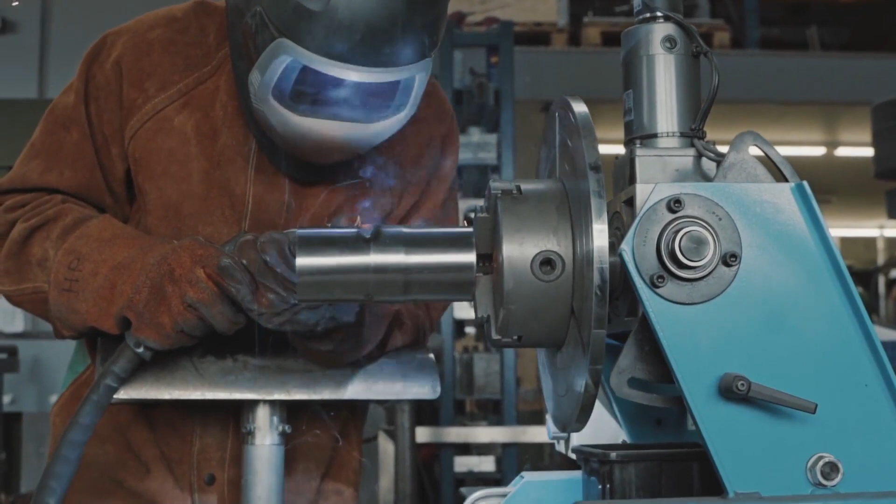Welding is a process of joining metals or non-metals. They can be similar or dissimilar, with or without application of heat, pressure or filler material. In more general terms, welding is a fabrication process whereby two or more parts are fused together by means of heat, pressure or both, forming a joint as the part cools.

Welding is usually used on metals and thermoplastics, but it can also be used on wood.

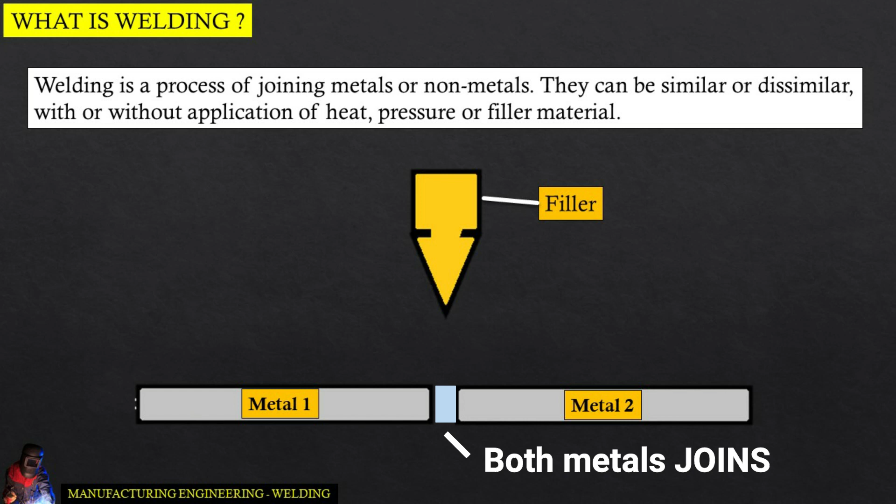The advantages of welding are: they generate strong joints. Welding process saves material, reinvestment cost is also low, and leak proofing can be done.

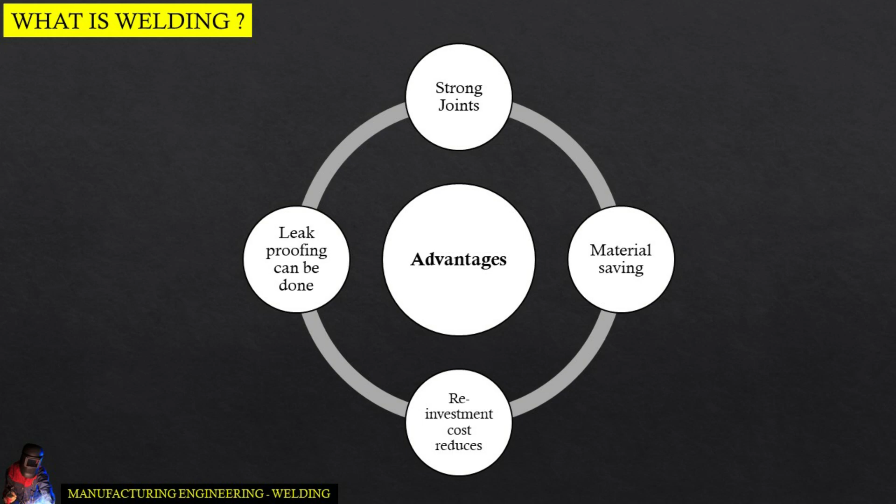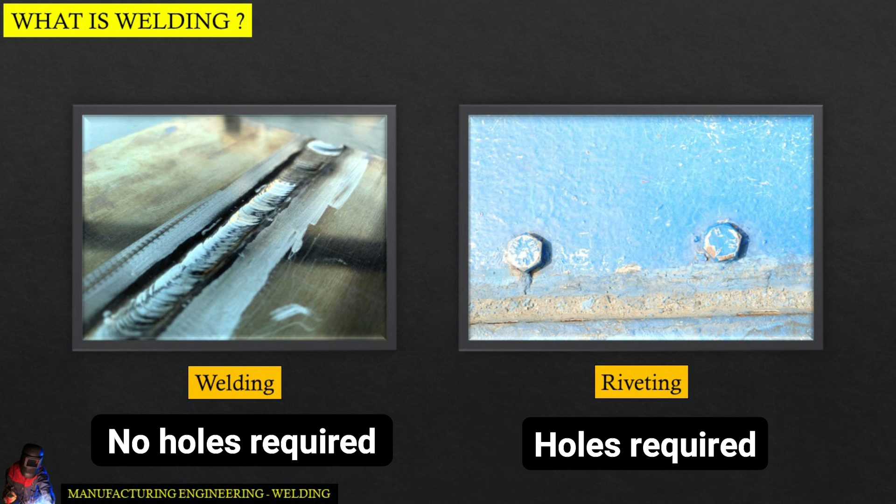Now let's differentiate between welding and riveting. In case of welding, no hole is required to drill on the parent component in order to join them, whereas in riveting, there is a need of through holes in specific locations on the parent component for the passage of rivets.

Strength of welded joints are quite high, often more than the strength of the base plates itself. However, strength of riveted joint is comparatively low.

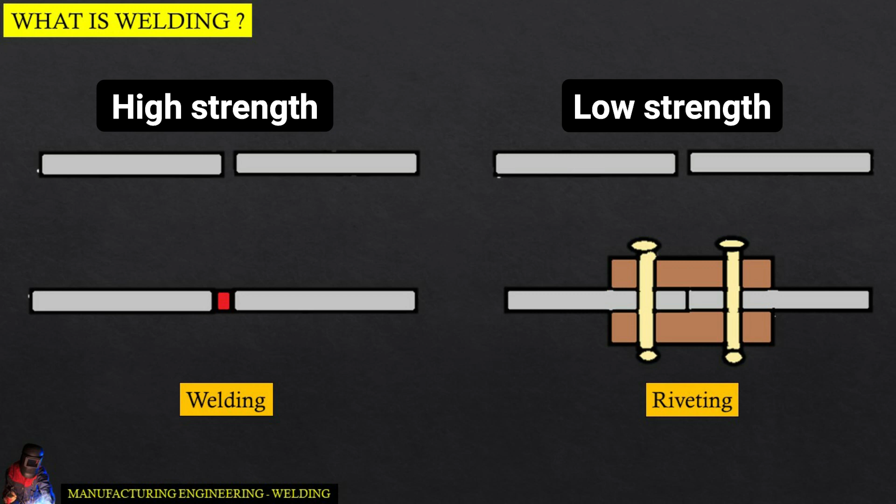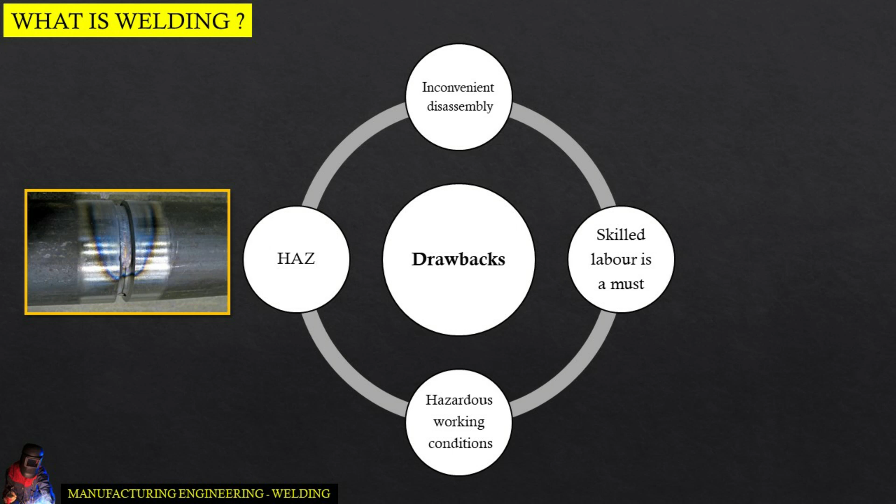There are certain drawbacks to welding as well. First being inconvenient disassembly. Second, you must have a skilled labor in order to carry on the welding process. Thirdly, the working condition is very hazardous. And fourthly, HAZ, or the heat affected zone.

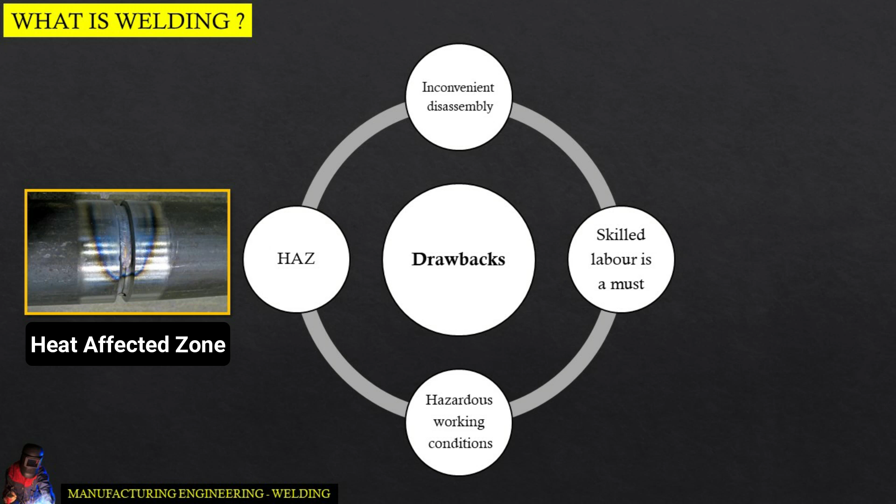In welding, the heat affected zone is the area of base material, either a metal or a thermoplastic, which is not melted but has had its microstructure and properties altered by welding or heat intensive cutting operations. The heat affected zone, or HAZ, refers to a non-melted area of metal that has experienced changes in its material properties as a result of exposure to high temperatures.

The alterations in material properties are usually a result of welding or high heat cutting procedures. The HAZ is identified as the area between the weld or cut and the base metal. These areas can vary in size and severity depending on the properties of the material involved, the intensity and concentration of heat, and the process employed.